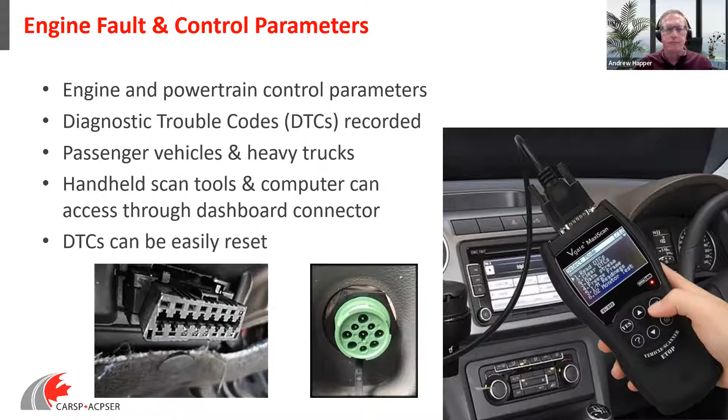A scan of a vehicle's network can yield a summary of diagnostic trouble codes that are currently active, as well as historical codes. In some systems, the odometer reading at the time of the tripped code is recorded along with other operating parameters, such as steering wheel angle, vehicle speed, or accelerator pedal position. Recorded codes and when they occurred can illustrate a timeline of events regarding a vehicle's condition and help pinpoint when it experienced a particular issue.

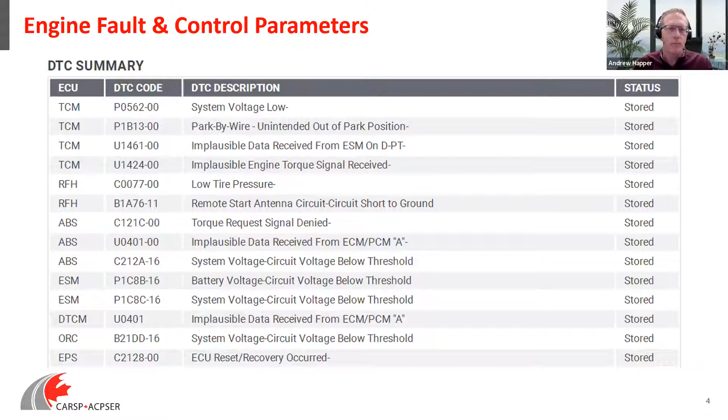Now let's direct our attention to the supplemental restraint system in a passenger vehicle. There is a control module that controls the deployment of supplemental restraints, such as airbags and seatbelt pretensioners. This module has been commonly called the black box in passenger vehicles.

The module has integrated sensors and is also connected to other secondary sensors to evaluate whether the supplemental restraints need to be deployed at the onset of a sensed event, which is characterized by a sudden change in acceleration or deceleration. The restraints don't always deploy in all crashes. The deployment criteria is designated by the manufacturer.

The secondary function of these modules is to record data surrounding the event. The vehicle manufacturers use these recordings to ensure their restraint systems are working properly and also to better refine system performance.

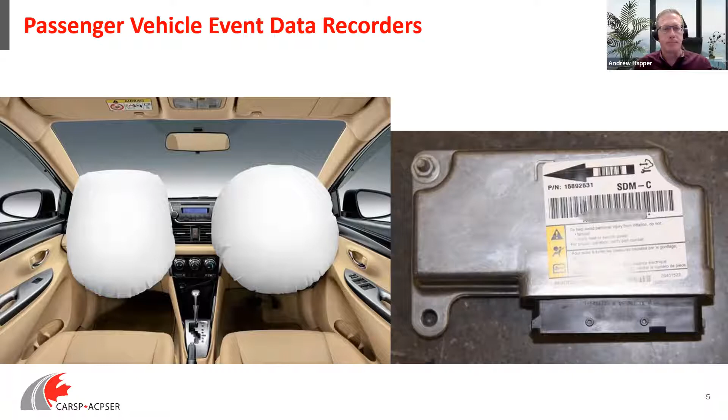99% of the new vehicles being manufactured today have event data recorders, or EDRs. This equates to over half of the registered passenger vehicles on the road having the capability to record EDR data, and this number keeps climbing. Vehicle models with this technology date back to around 1996.

Most of the EDRs are accessed with a specialty tool called the Bosch Crash Data Retrieval System. It's been around for 22 years. The system is comprised of interface modules that connect to the various vehicle networks, cabling, and a licensed software subscription.

In order to get the information from the vehicle, vehicles with intact electrical systems can be powered up and accessed using the DLC, or diagnostic link connector, under the dashboard. In cases of severe damage where the electrical system is damaged, the information can still be accessed, but it takes more time and effort to either extract the physical module itself or access it directly in the vehicle. The modules are typically installed in the vehicle somewhere near the center of mass.

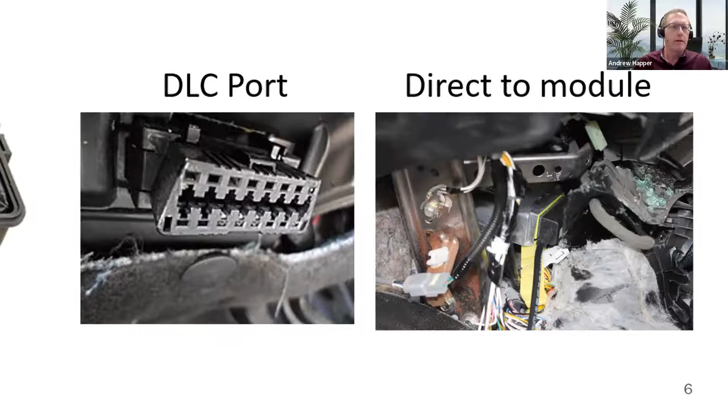If you look here in the right side image, this shows the airbag module sandwiched underneath the dashboard. Due to the deformation that occurred in the collision, it was challenging to get to. The yellow adapter here is the harness that was connected to the module, which was then removed. This black cable is the direct module cable that's connected directly to it. Right there.

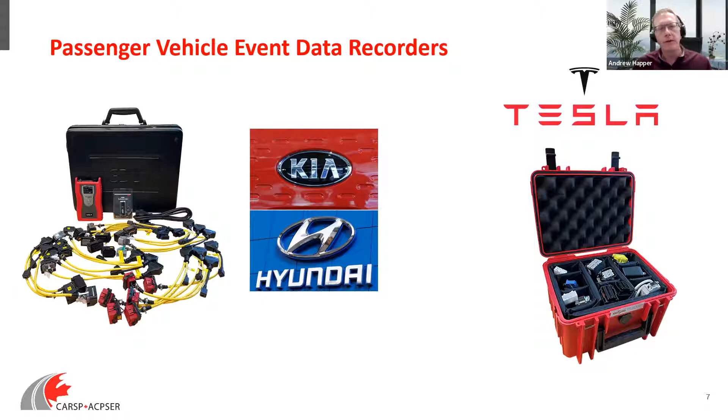Now, the Bosch CDR tool will access the majority of passenger vehicles. However, there are a few notable exceptions where other manufacturers have their own tools and kits that must be used to access the data. Three of these are Hyundai, Kia, and Tesla. These systems work in a similar manner, in which they can connect to the airbag module through the DLC port or by connecting to the module directly.

Events recorded by EDRs are triggered after the system wakes up. If a module deems that an occupant restraint deployment is warranted, then it will record a deployment event. Otherwise, a non-deployment event is recorded. Deployment events cannot be erased from memory, but non-deployment events are volatile and can be overwritten.

On older vehicles, 15 to 20 years plus, these non-deployment events could be erased after a certain number of ignition cycles or overwritten when a more severe event occurred. Those older vehicles could only retain one non-deployment event, so these could easily be overwritten over time. More current vehicle models, however, can retain several events, so non-deployment events can stick around for a longer time frame. The type of information recorded in these events is similar, and I've listed here some of the main parameters.

They'll record the collision impulse or an acceleration time graph. They'll give some pre-event data, typically 5 to 8 seconds, including vehicle speed, engine RPM, acceleration, steering wheel angle, and yaw rate. It depends on each vehicle make and model and the age of the vehicle exactly what kind of information you'll see. It will also give signal timing and information about what deployments occurred, and it will tell you what the driver was doing regarding braking and acceleration application.

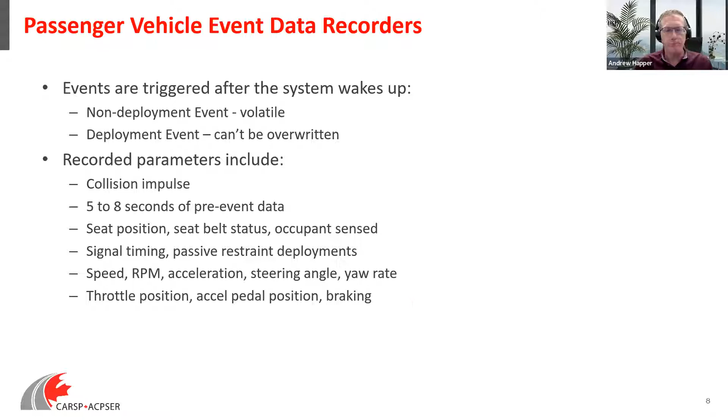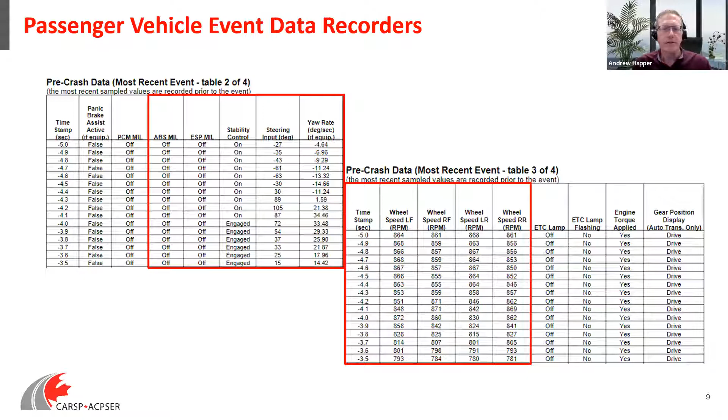Here's an example of some of that information from a passenger vehicle EDR. Newer vehicle models will give you even more data, including things such as ABS and stability control engagement, as well as steering input and vehicle yaw or rotation rate. These details can indicate whether or not a driver may have lost control of the vehicle, whether due to high speed or environmental conditions. Some EDR reports also include individual wheel rotation speeds, which can be used to confirm ABS engagement, vehicle alignment, and contact surface friction differences from the presence of ice or snow. So quite useful information from that perspective.

I wanted to mention powertrain control modules as well. On select Fords between 2003 and 2011 model years, they had PCMs that also recorded data. But these modules did not record events like EDRs did. They continuously recorded aspects of vehicle operation as long as power was applied to the module, so it was basically a circular memory buffer. The data was similar to the pre-crash data found in EDRs, such as vehicle speed, engine RPM, and pedal positions. However, the unique aspect of these recordings was that they had memory that could contain anywhere from 20 seconds up to 5 minutes of data. This data was very volatile and would be overwritten if the ignition key was turned on, so care would have to be taken when downloading the data with the Bosch CDR system.

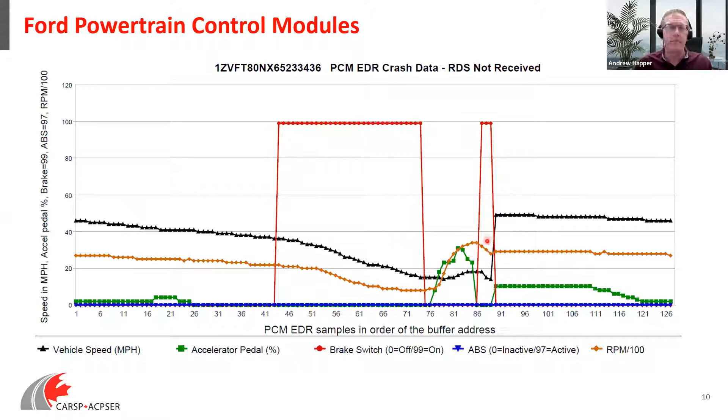I also want to mention motorcycles, as they too have EDRs. There's a limited number of manufacturers making them with this capability. To my knowledge, Honda Goldwing and newer model Kawasakis are the two main vehicle makes. There's no tool available at this time, so modules need to be extracted and sent to the manufacturer. The triggered events on these motorcycles can be airbag related, such as in the Honda case, or related to a tip over with a specific rear wheel rotation. The Kawasaki data can contain 8 seconds of information, including vehicle speed, throttle position, and what gear the motorcycle is in. I have little information right now on how many events it can record, but it's also useful to know that some off-road vehicles, such as snowmobiles and ATVs, have the capability to record some events.

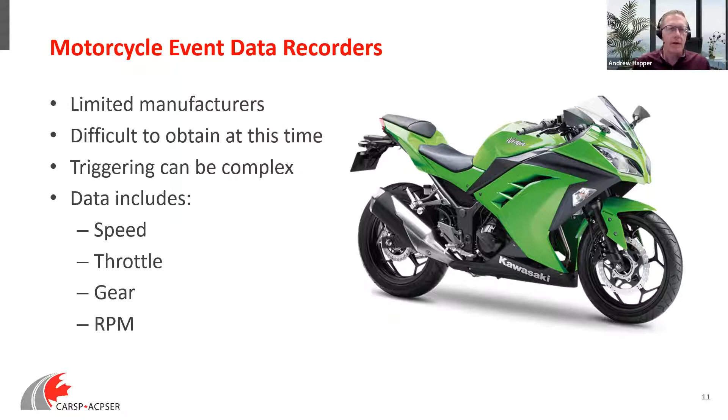Now I want to talk about ADAS. These are the newer systems that have been developed and are becoming more and more common. Advanced driver assistance systems use a combination of radar and cameras to detect issues and provide different warnings to the driver. These could be visual, audible, or haptic, such as vibrations in the steering wheel or seat. And if the warnings are not enough for the driver to respond, the vehicle may actively intervene with braking or steering.

Radar uses a transmitter that emits a signal in a given direction, which bounces off an object, and the receiver picks up the reflected signal. It can then be determined what the separation distance is, as well as the speed of the object that reflected the signal. Cameras are mounted at the top of the windshield, monitoring lane lines and objects in its field of view. The cameras can track vehicles and objects, determining their trajectories and time to collision. The algorithms used for analyzing the visual information have advanced greatly, resulting in numerous applications. What I'm showing you here in this figure shows several of the applications you'll see in modern vehicles. Each manufacturer uses its own terminology for describing these different safety features, but you'll find these systems on both passenger vehicles and heavy trucks.

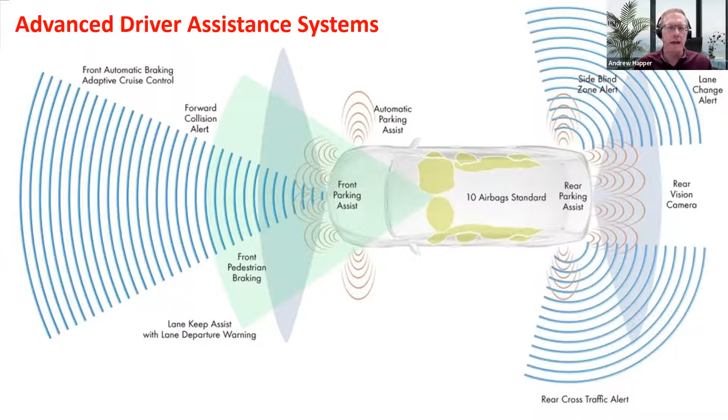In general, most of the new driver assist technologies are not yet recording data. For those few systems that do log data, the manufacturer may need to get involved to access the information, either by sending the module away or having them attend the vehicle.

One exception to this is that GM has allowed access to their active safety control module and their front camera module data through the conventional CDR tool on 2016 and newer vehicle models. Now, the ASCM can only store one event, recording about 4 seconds of data that's triggered by an auto brake or an airbag deployment.

The other tool to mention is the Toyota TechStream tool. It too can give access to pre-collision system data on Toyotas and Lexus vehicles. Now, the data related to collision warning systems can include details not only of the vehicle that it's on, but also about the other detected vehicle.

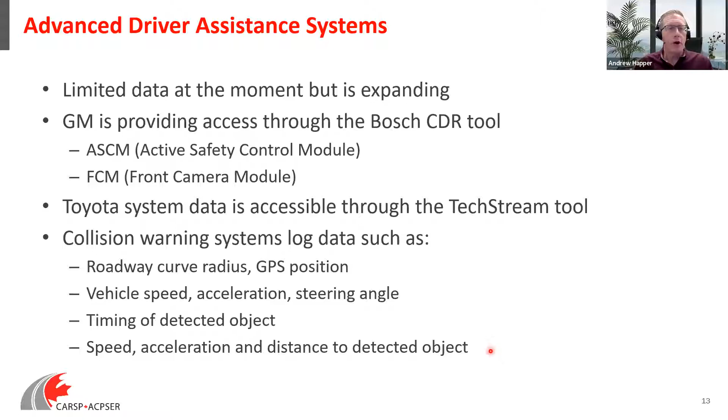This data can be time-stamped and geolocated as well. What I've listed here is some of the information you'll find on these systems. Some of them give you roadway curve radius, vehicle speed, acceleration, steering angle, and information about the object that's been detected in front. I'm going to show you a couple of examples here.

Here's an example from the Toyota TechStream tool, which is a very versatile tool providing access to multiple ECUs. The tool can be used for reviewing detailed diagnostic information and can also be used, in this case, to access pre-collision system data related to autonomous emergency braking events. The system records numerous operating parameters about the vehicle for 5 seconds before and 5 seconds after the detected event.

The key difference about the ADAS data compared to the EDR data is that EDRs record information related to an impact or collision event, whereas the ADAS record data related to sensed objects ahead, where a collision doesn't necessarily have to have occurred.

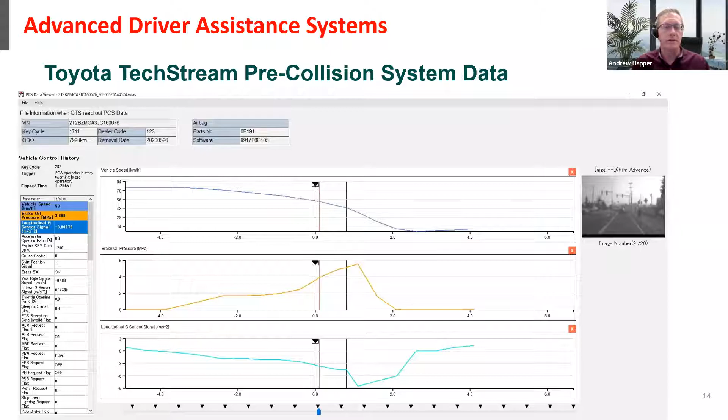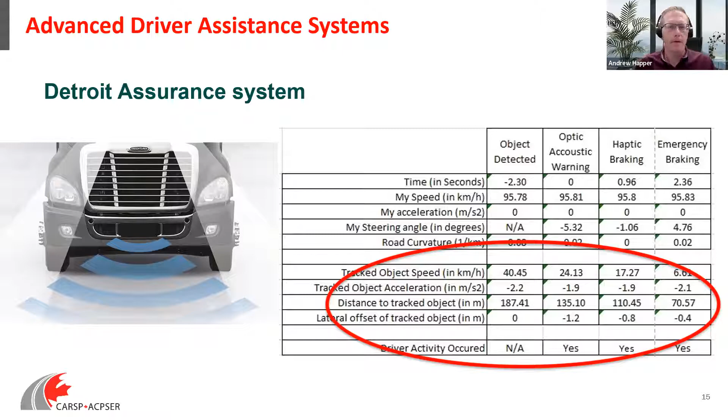So on the topic of heavy trucks, let me talk a bit about the EDRs on heavy trucks. Since about 1997, heavy trucks have had EDRs. But since most trucks don't have passive restraints, these EDRs do not record events related to airbag deployments.

The events that are recorded by heavy truck ECMs are categorized into 3 types of events. The first type of event is a hard brake or a sudden deceleration. This is triggered by a heavy brake application or a collision that causes the truck to decelerate beyond a threshold, typically around 0.4 G.

The next type of event is a critical fault. This is related to an engine sensor that has a reading that's beyond a certain value, which triggers a fault event. The third type of event is a last stop event, where it records information the last time the vehicle comes to a stop.

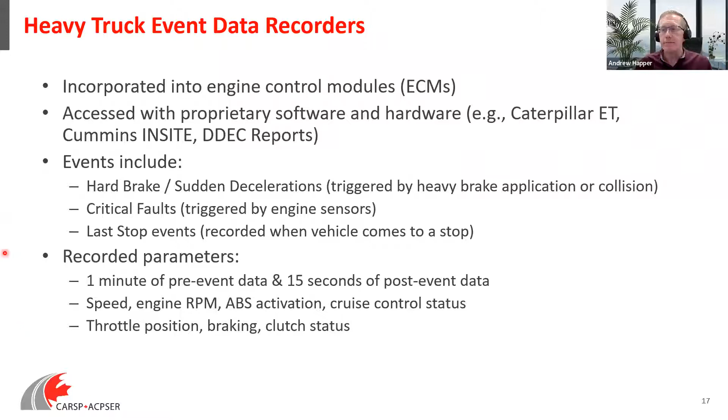Some heavy truck component suppliers have systems for performing operational diagnostics that also include data recorders. Bendix is an example of this, with ECUs for monitoring anti-lock braking, stability control, and traction control. These data recorders can record triggered events based on brake activation and collision mitigation systems, capturing about 20 seconds surrounding that event, including vehicle speed, steering angle, accelerator, and brakes. But in order to get this information, you have to make a request to Bendix.

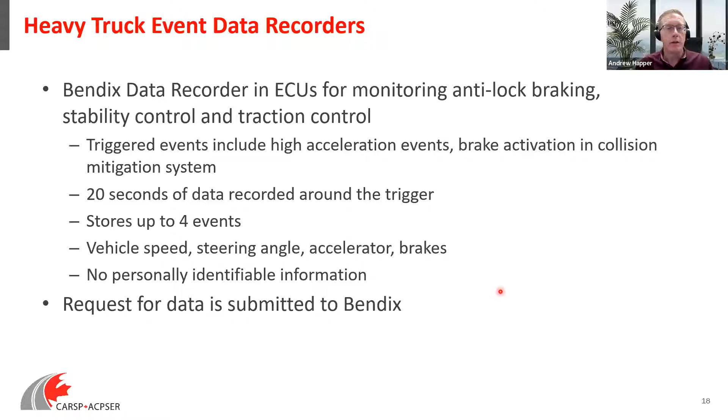Now we're entering an era where images and videos are being captured by motor vehicles. These images are recorded by cameras utilized as part of ADAS or driver assist technologies for collision avoidance applications such as lane departure warning, night vision, adaptive cruise control, and pre-collision braking. These systems are in both heavy trucks and passenger cars, but because these technologies are relatively recent, commercially available methods for accessing this information have not yet become commonplace.

In most cases, a request of the manufacturer has to be made, as in the Detroit Diesel VRDU and Bendix collision mitigation systems. But there are a few exceptions, which I'm going to talk about here: GM, Tesla, and Toyota. As I mentioned previously, GM's active safety control modules and front camera modules are recording event data and also recording images. Unfortunately, I don't have any examples to show you of that because I haven't yet had the opportunity to access any of those. But Tesla records both videos and images, and the Toyota TechStream will record still images around a sensed hazard event or a case with its automatic emergency braking.

Let's talk about Tesla quickly. Teslas have a dashboard camera as well as side view cameras that will record to a USB in the center console. The vehicle owner, though, has to set up the USB for these recordings to be accessible. In addition to capturing a forward-looking dashboard camera view while driving, the Tesla system has a Sentry mode that can capture vehicle movement when the vehicle is parked. It will pick up vandalism, thefts, and hit and runs. Here's an example of a hit and run captured by a Tesla that was parked.

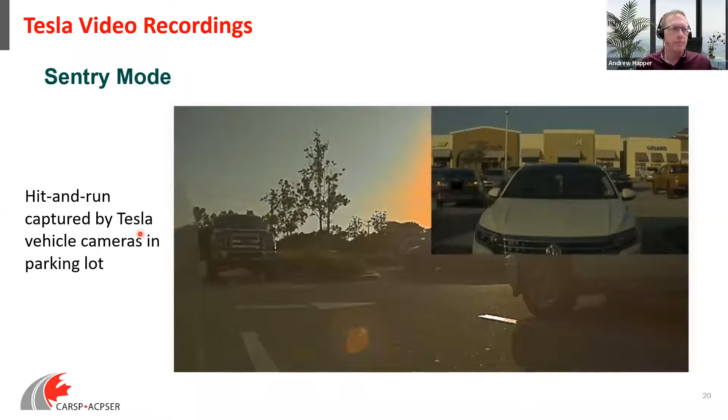On the left side is a video frame from the camera mounted to the side of the vehicle, looking backwards. The upper right is the forward-looking view from the camera. In this case, the Tesla video cameras were able to capture the hit and run culprit and also get the license plate from that vehicle in the video because it's very high quality.

The Tesla will also capture images. I've shown this example, which some of you may have heard about: the Delray Beach, Florida fatal crash that happened in March of 2019, where a 2018 Tesla Model 3 that was on autopilot collided with the side of a tractor trailer unit. In this case, they were able to extract still images from the Tesla camera system at 1-second intervals leading up to the point of impact.

So the top image here is at 5 seconds before the impact, then 4 seconds, 3, 2, and 1. As you can see, these images are fairly good quality in color, and of course show the progression of the tractor trailer unit across the path of the Tesla. So these images can be very useful in piecing together what happened during an incident.

The Toyota TechStream, on the other hand, has low resolution black and white camera images that can be recorded before and after a trigger point. These 6 images were captured in a Toyota that was driven in an alleyway and subsequently struck the corner of a garage. This was a hit and run claim where the owner claimed they had sustained front bumper damage while parked in a parking lot. After examining the vehicle, we were able to see the nature of the damage on the front bumper and download the technical data, showing that in fact this front bumper damage resulted when the person was driving the vehicle and struck the garage. So this was able to refute the owner's claim.

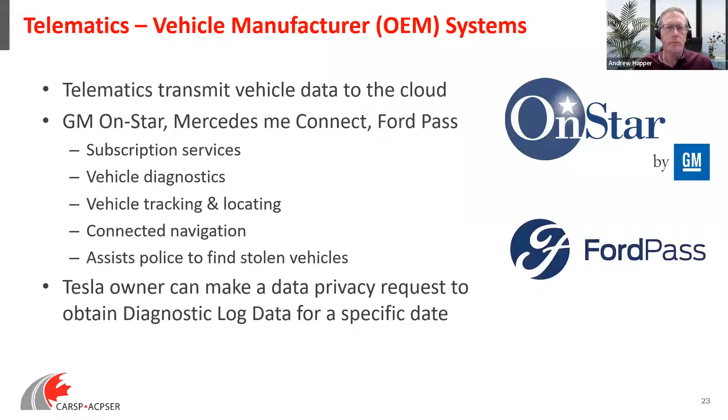These systems typically involve a GPS receiver that is permanently installed on the vehicle in conjunction with video cameras and other sensors. These systems don't assist drivers, but provide for review of vehicle operation by the fleet manager, who can use a web browser interface to track both real-time and historical data. These systems retain information for years as data is continuously uploaded to online servers.

The type of data included on these systems, because it's GPS-based, will provide a timestamp, latitude and longitude of the vehicle. From that, it'll give its altitude, heading, and speed. But the video camera feeds and sensor outputs are also tied in with that.

An example of a sensor would be, for example, a municipality or a city that has a fleet of vehicles - garbage trucks, sanding trucks. They can input sensors to know when those vehicles were activating, depositing aggregate on the roadway, or when they were lifting garbage cans into the truck, so they could monitor the performance as well.

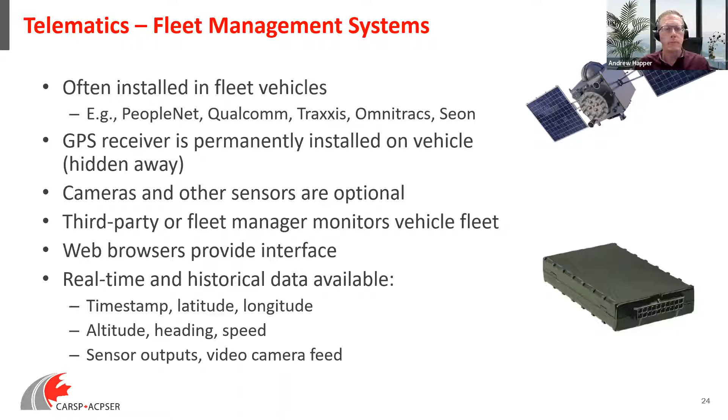Devices can also be plugged into the vehicle's DLC adapter that transmit information to a cloud server. This information can be used to track the vehicle operation. For example, a teenager's use of the family vehicle can be monitored.

Telematics is a growing trend for insurers in jurisdictions around the world, as prudent drivers can benefit from lower insurance rates and insight into their driving behavior. As an example, with the Tech Pilot project that ICBC completed, they wanted to explore if telematics could help reduce crashes and improve driver behavior. Their program involved an app with a smartphone that connected with a device on the vehicle.

I want to give some mention to aftermarket devices that can be commonly found in motor vehicles. Personal navigational devices were more common before smartphones, but they are still used today. These mobile GPS devices - Garmin is a common brand, of course - can log GPS location.

Dashboard video cameras are also becoming more popular. These cameras can be found looking forward out the windshield, or looking rearward out the rear window, or rearward at the driver. They can also have integrated GPS and acceleration event sensing. The recordings on these devices are fairly easy to access, as the devices or their digital media cards can be plugged into a computer and read directly in a file explorer.

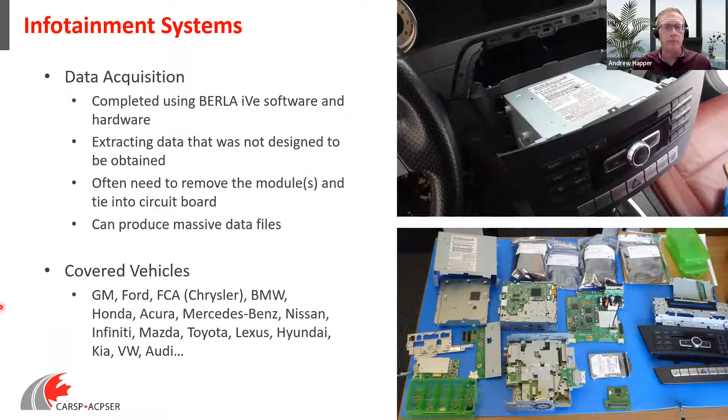The data found on these systems will be module dependent. Some units contain very little data, while others will have an overwhelming amount of data.

One of the key things it records is device connections, such as devices connected via Bluetooth or USB to the vehicle. When those devices connect, the system tracks a unique identifier and the type of device that's connected, for example, whether it's an iPhone or a Samsung. Other information that comes with that connection includes contacts stored on the phone, media files, call logs, text messages, and internet activity. This really makes you think about what kind of data someone may be leaving on a vehicle, especially a rental car, when you get in and connect your mobile device.

These modules can also record vehicle events. These aren't the same type as crash events, but events related to the operation of the vehicle, such as the door opening and closing, lights turning on, and gear shift changes. It'll track where the vehicle was when the odometer clicked over, and some modules will monitor hard brake and acceleration events. If the car has navigation, it will also allow geotagging to occur with each of these events. Track logs are available that can show the travel history of the vehicle.

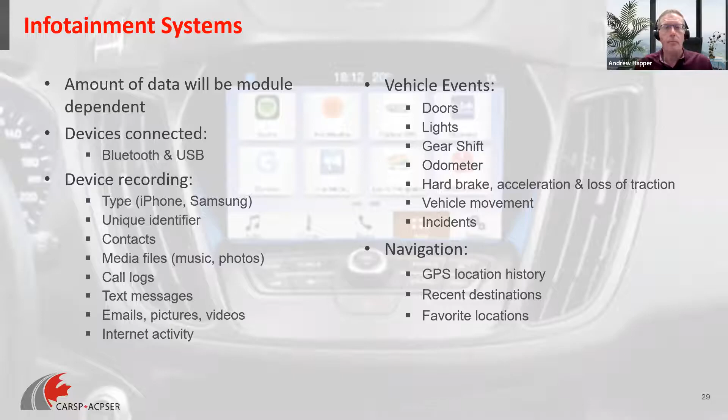Unlike EDR event data, which is fairly limited, infotainment systems yield vast amounts of data. This slide shows an example of the overwhelming amount of data one can get from a vehicle. What I'm showing here is from a Sync Gen 3 infotainment unit on a Ford. On the left sidebar, you can see connections, devices, and thousands of events here, as well as navigation.

Taking a closer look into the events, we see media and device events, call logs, odometer and gear shift events, door and wheel traction events, hard acceleration and hard braking events. Within the hard braking events, there are date and time stamps associated with it, as well as geotag locations. This can give an idea of the driving maneuvers on any particular date, which is listed over here on the right, along with a graphical illustration of the geotagged information.

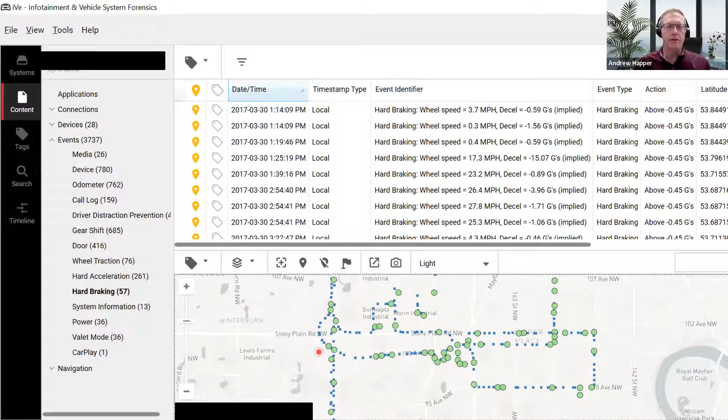Intelligent transportation systems are now being developed that use advanced communications to solve transportation challenges. They are being implemented in roadways, intersections, and traffic management centers to link infrastructure and vehicles in real time. Canada is playing a lead role in the development of this technology, with the active Aurora partnership in BC and Alberta, with the only real-world testbed for V2I communication.

V2I, or Vehicle to Infrastructure Communication, is the wireless exchange of data between vehicles and road infrastructure. Vehicular communication systems are computer networks in which vehicles and roadside units are the communicating nodes, providing each other with information. Roadside units can take data from vehicles and evaluate traffic conditions, optimize signal timing, and communicate back to other vehicles. Some infrastructure systems simply detect Bluetooth-enabled devices to evaluate traffic flow patterns, while others communicate with the vehicles and alert the driver to pending threats. This can be effective in avoiding accidents and traffic congestion.

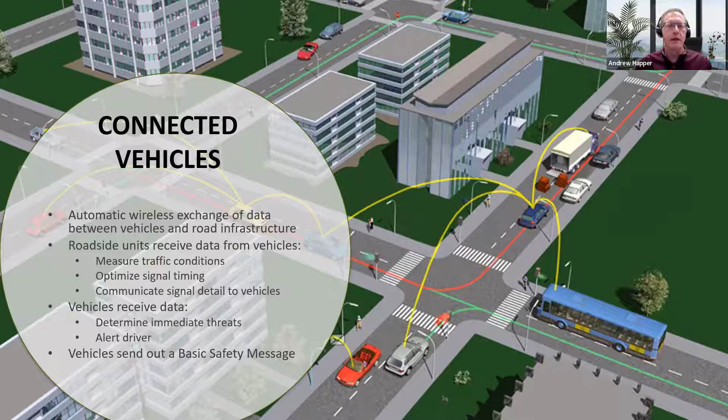The information sent out from vehicles is sent out in what's called a basic safety message. The information contained in this is fairly standardized. It includes a temporary ID, the vehicle position, some basic parameters of the motion of the vehicle, the brake application, and the vehicle size. There's also Part 2 data that contains a variable set of data elements depending on the vehicle model. These additional elements can be transmitted less frequently and include things like windshield wiper status, ambient air temperature, traction control status, and anti-lock brake system status.

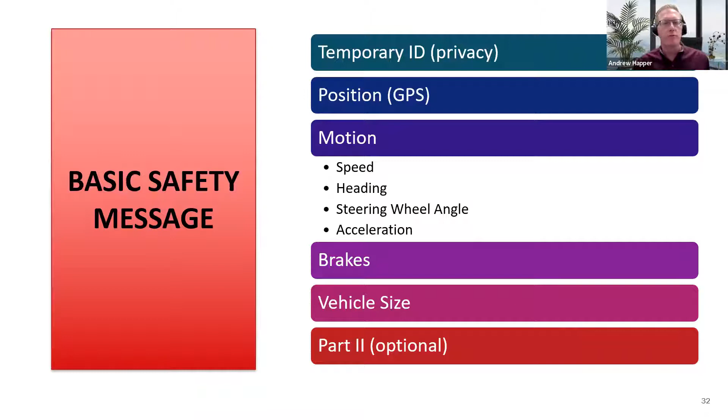This information can be used to help communicate changing road conditions and when hazardous situations arise.

There are a couple of established ways for wireless communication to take place. One uses a dedicated frequency bandwidth, and the other rides over top of the cellular phone architecture. The range of the roadside units is about 1 kilometer, so communication can take place over large distances.

There currently is no way for the data to be recorded or accessed by others. Now, this may change in the future, but as you can imagine, cybersecurity risks for V2I and V2V technologies are paramount, and a key part of future research initiatives. Data within the vehicle and wireless communication needs to be secure, otherwise mayhem could occur if vehicles become compromised.

So that is my overview of all the information that's stored in motor vehicles. Let's take a look at the ownership of the data. In general, data stored in vehicles can be classified into one of two categories.

One is vehicle-specific data. This includes diagnostic trouble codes, EDR data, ECU data, GPS location. These are things that can be observed when the vehicle is being operated, and there's really no expectation of privacy.

The second type of information we'll call person-specific. This is the information typically found on infotainment systems, including information about the devices that connect to the vehicle, as well as personal contact information, call logs, texts, and other media.

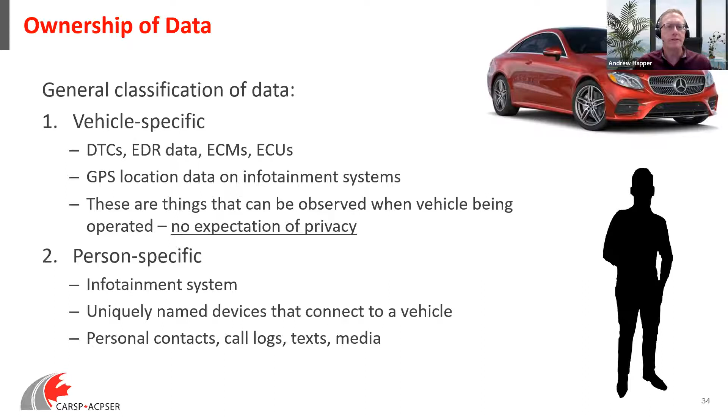Over the past 20 years, there have been more than 75 cases in Canadian courts that have dealt with the acquisition and acceptance of electronic data from motor vehicles. The data has been accepted in the courts as long as the person representing the information has obtained it lawfully and is able to explain what the data means.

In general, these court cases have dealt with EDR data or vehicle-specific data. There hasn't been much that deals with the newer ADAS technologies or infotainment systems or that person-specific data. Nonetheless, the owner of the vehicle has been established as the owner of the electronic information. Therefore, the vehicle owner has to provide permission or authorization for the information to be collected.

Vehicle manufacturers have been putting detailed descriptions in owner's manuals, so vehicle owners should have an idea of the nature of the information that their vehicle records.

To my knowledge, there is not much precedence in who owns the person-specific data that resides in motor vehicles, particularly when there may be personal information of other people residing in the vehicle's memory. Imagine a rental vehicle that has had multiple renters connect their personal phones to the infotainment system. There could be a multitude of personally identifying information that is unrelated to the rental car owner.

To date, since that person-specific information is contained within the vehicle, police agencies and insurance companies are handling it as though the vehicle owner is the gatekeeper.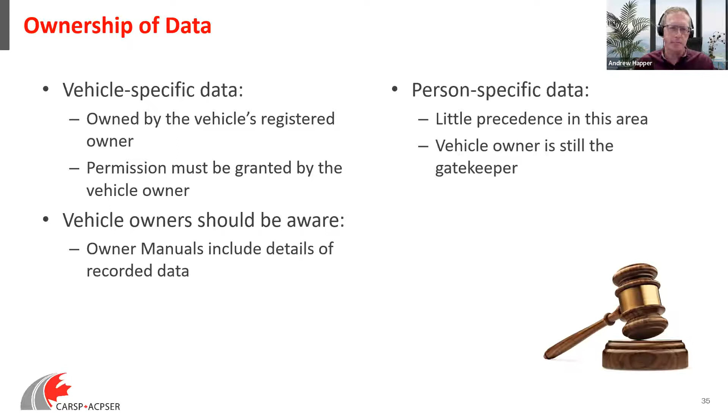So now let me address the accessibility of this data and how one goes about obtaining it. The first type of data I spoke about, that is the engine fault codes, has fallen under the radar and really hasn't been a concern from a privacy perspective. Most consider this data as an integral part of a motor vehicle, as it does not contain any personally identifying information, and to the layperson may not have any meaning.

These fault codes are accessible by scan tools that are easily obtainable, and any auto repair facility, car dealership, and private investigator can access them. The other vehicle data, though, has been handled differently, as special tools are needed. Only police and private investigators are typically the ones trying to access that data. I should iterate that automotive dealerships do not have the capability to access EDR and infotainment system data.

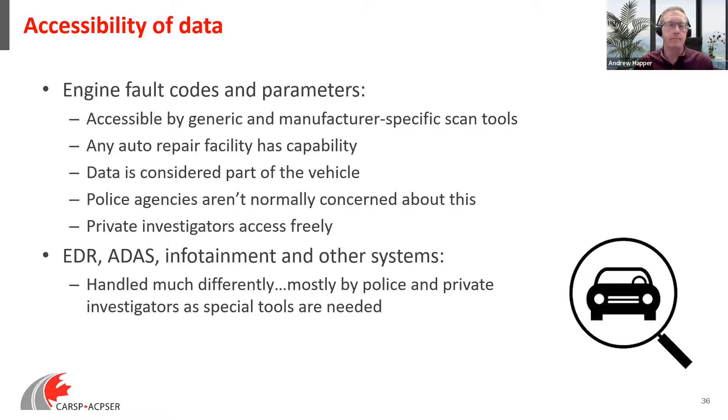Police agencies are commonly involved in accessing motor vehicle data as they are the first ones on the scene of a serious motor vehicle collision, and they must complete an investigation to see if anyone should be charged. The police are most interested in EDR data as that can contain vehicle speed, which is one of the key parameters they are interested in evaluating because they want to see if someone was exceeding the speed limit.

The way that police handle accessing EDR data depends on the jurisdiction, but most agencies will get search warrants for all vehicle downloads. Some, however, will complete a download at the scene of an accident for ease of access and as part of the on-scene investigation. Since preservation of evidence is important, they can argue that they needed to do the acquisition on site.

Now, police have told me that they can access vehicle data by getting an owner's authorization, but they would need to prove that the owner had informed consent. And it's a fine line because an owner may not know the full scope of information that's being obtained. If it's later found that there was a piece of information they weren't aware of, then evidence can be thrown out. So the safe approach for the police is to always get a search warrant.

In the case of criminal charges, a search warrant is definitely always obtained, and the warrant has to specify the type of vehicle information that is to be acquired.

The private work completed by investigators, such as forensic engineers like myself, is normally done on behalf of an insurance company or a legal representative. Insurance policies set out the requirements of an insured vehicle owner to cooperate with their insurer whenever a claim takes place. For example, the policy might state that the insured must aid in securing information and evidence and must cooperate with the insurer, or that the insured must permit the insurer at all reasonable times to inspect the automobile and its equipment. It's this underlying agreement that allows insurance companies to investigate claims and collect all the available information needed to make an informed decision.

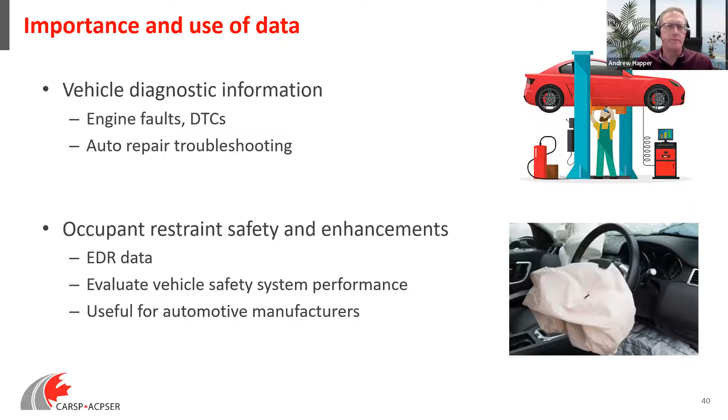In addition, monitored vehicle fleets and telematics systems can be used for real-time assessment of collision occurrences, vehicle locations, vehicle operation, and driver behavior. This is valuable information for fleet managers to evaluate employee performance, vehicle performance, and identify risks before they result in lost-time incidents.

Also, connected vehicle-to-infrastructure information can evaluate roadway hazards as they develop in real time. This real-time information processing can also be implemented into a risk management program that monitors and evaluates driver performance, facilitating immediate corrective practices, as well as vehicle performance for immediate maintenance requirements, both of which can improve fleet safety.

But let me explain how this electronic data can be used for insurance and legal liability. In my work, I'm hired to analyze physical evidence and electronic data from vehicles to evaluate what happened during a motor vehicle collision or incident. The results of my work are used by my clients to determine how liability should be apportioned, whether there is subrogation potential against another involved party, or what amount the insurance company should be preparing to pay out for quantum, or the damages.